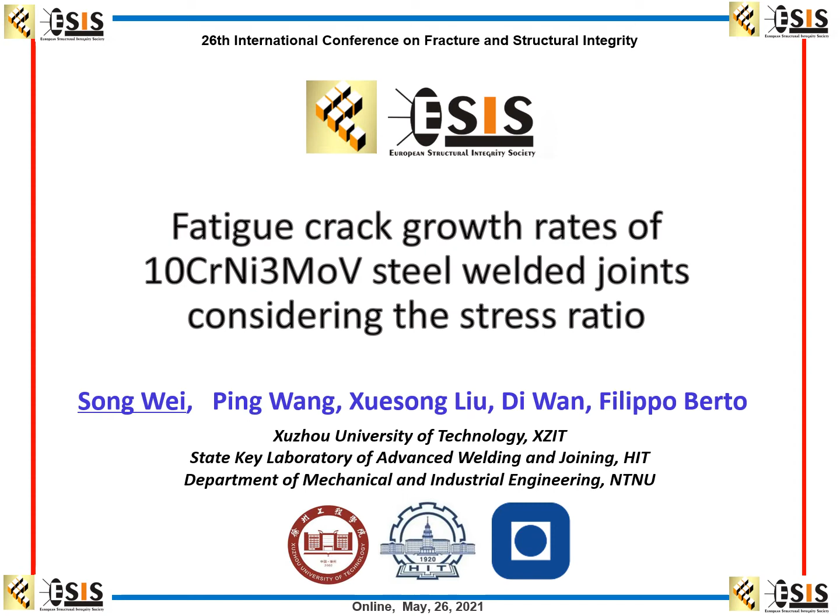This particular presentation is analyzing the basic fracture properties of a high-strength steel and its weldment, considering the stress ratio, but as part of the larger project of design, analysis as well as manufacturing of ship and submarine welded components. So this presentation contains four parts.

The first one is about the motivation of our investigation. The second is about the fatigue crack growth rate experiments. Third is about the result of the fatigue crack growth. The fourth is about the conclusion.

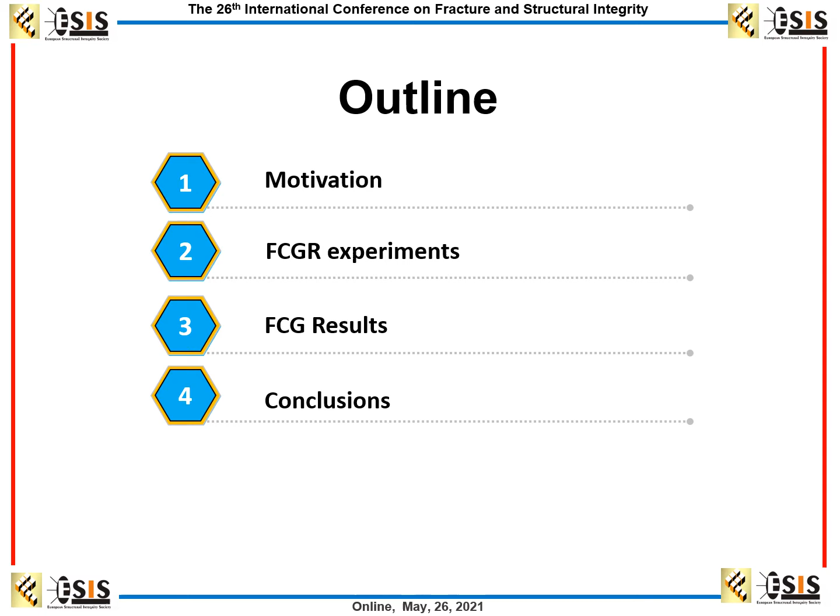Some background and motivations for the work: as many of you may know, within future industry development, one effective way to enhance the lightweight of structure is to increase the strength of steel for decreasing the thickness of the plate. It is dealing with a conventional material. How about the structural performance, especially for the welded components? For example, there is no corresponding welding filler for high-strength steel or very high-strength steel in our country.

However, for these components, which are driven by cyclic loading or fatigue loading, there is a unique opportunity to utilize the high-strength steel and investigate the performance of the specific welded joint weldment. So in the shipbuilding or marine structure fields, this welding is very common.

So for the welded joints of high-strength steel, there are some problems during the welding processing or the service condition. The first one, the hydrogen-induced cracking issues, or the softening of the HAZ and the decline of the toughness. How to solve the problems? We can do it from two aspects.

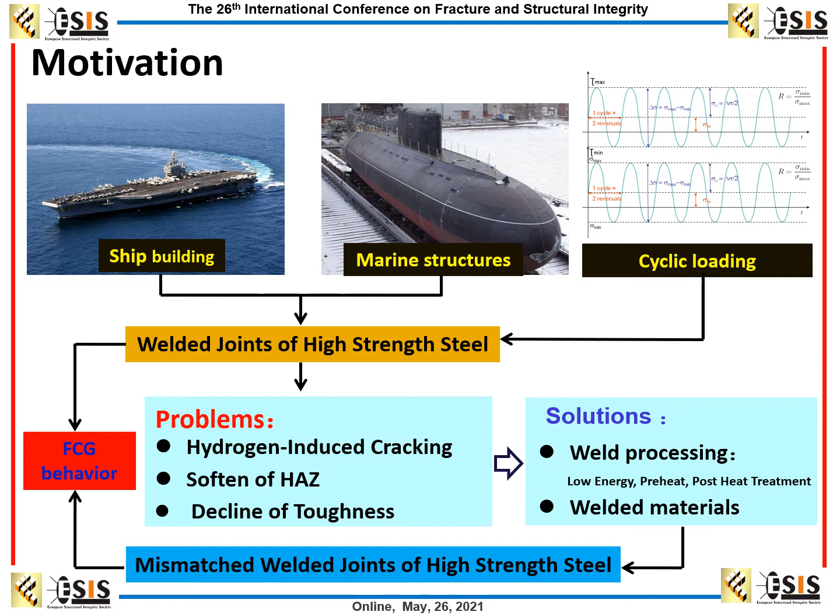So how about the fatigue crack growth behavior? So this is the topic of our presentation, our work. Thus, the study aims at investigating the FCG properties of base metal and mismatched weldments. The second is the stress ratio and post-heat treatment effect on the FCGR of materials. The third is the FCGR mechanism of the base metal and the mismatched weldment.

In future, the possible application of this study: the first aspect is about improving the FCG, fatigue crack propagation life prediction of the welded joint, and the mechanism of FCGR is analyzed through crack paths in the microstructures and the fractography.

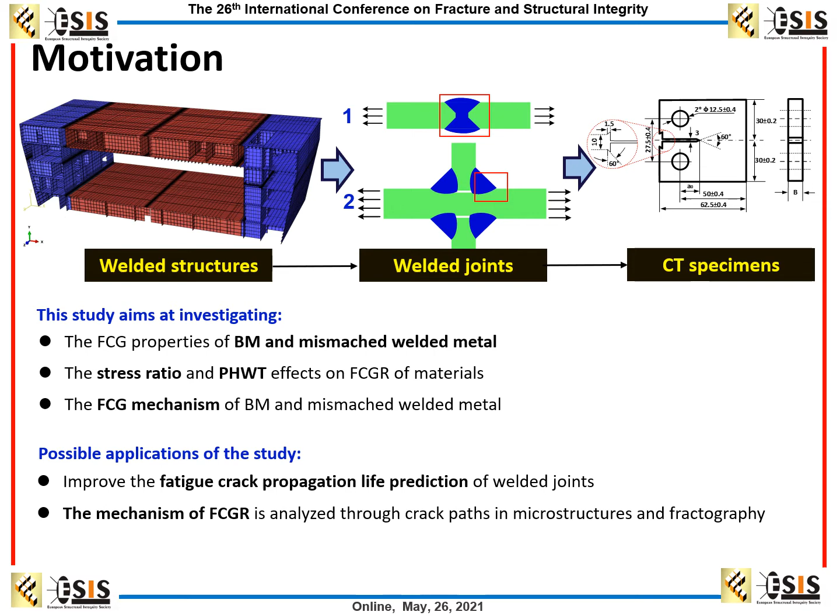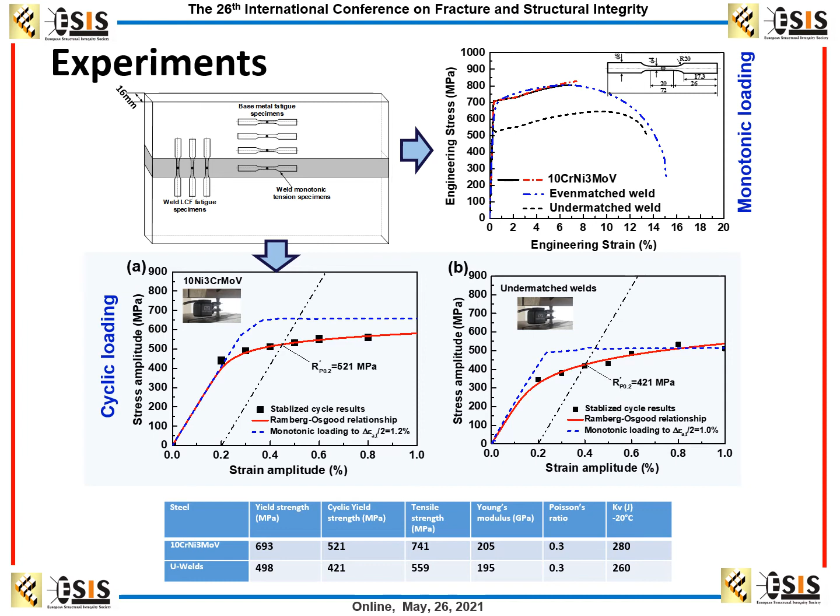This is the basic mechanical properties of the materials. So the parameters of the materials are presented in the summary. We get the CT specimens from the thick welded plate, which is made by the multi-pass welding processing.

The details by which the experimental investigation to characterize both the welded joint and the properties were conducted are as follows. It should be noted that the test frequency ranges from 10 Hz to 15 Hz for all the FCGR tests, conducted by using several hydraulic controlled load frames.

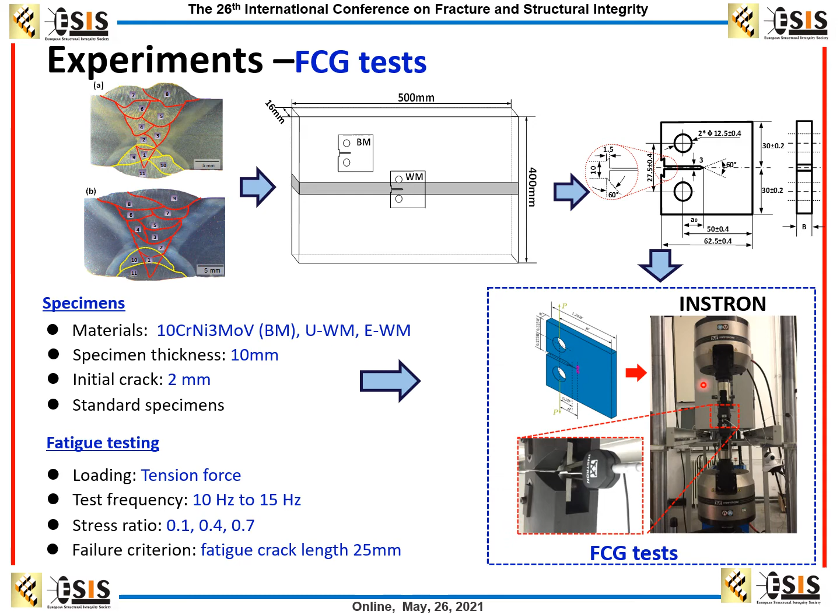And three stress ratios are loaded in the test, and the crack propagation length of 25 is defined as the failure criterion. So this is the machine of the FCGR test.

The FCGR result is presented in this page. We compared the base metal, even matched weldment and undermatched weldment at the residual stress ratio 0.1. From the result, we can see the FCGR comparison between the as-welded and the PWHT steps conducted for these materials. The FCGR of base metal isn't influenced by the PWHT processing in the first figure, which means that there is no residual stress effect on the FCGR in the base metal.

The FCG data on the base metal are compared with the BS 7910 and the IIW standard simplified Paris law reference lines. And it can be seen from the undermatched weldment figures that the difference between the as-welded and the PWHT state for the undermatched seems to have no significant effect on the FCGR data at stress ratio 0.1.

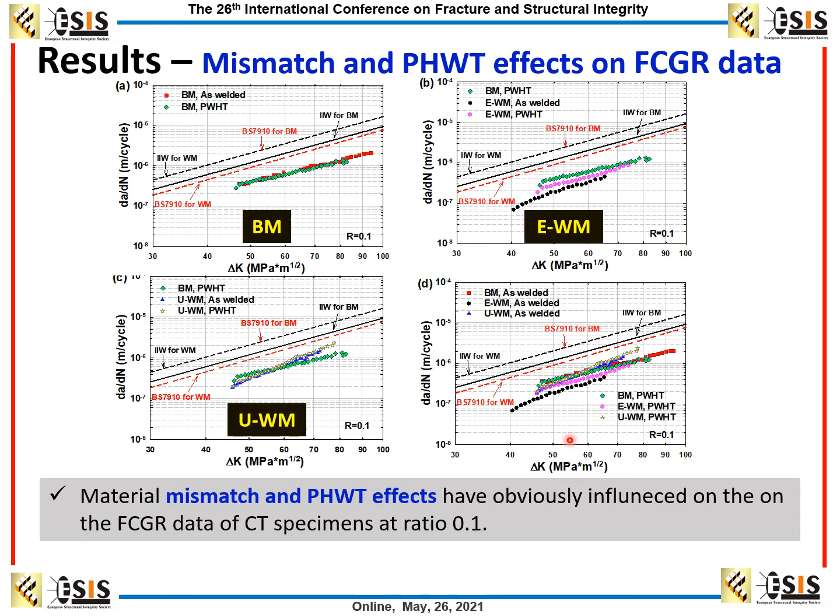So the FCGR data are summarized in this figure for these three materials. The material mismatch and the PWHT effects obviously influence the FCGR data of the CT specimen at ratio 0.1. Although some articles report that the R ratio sensitivity is essential in some high strength steel materials or bridge structure steels, the R ratio effect on the FCGR data of our study is visible, especially for the even matched weldment.

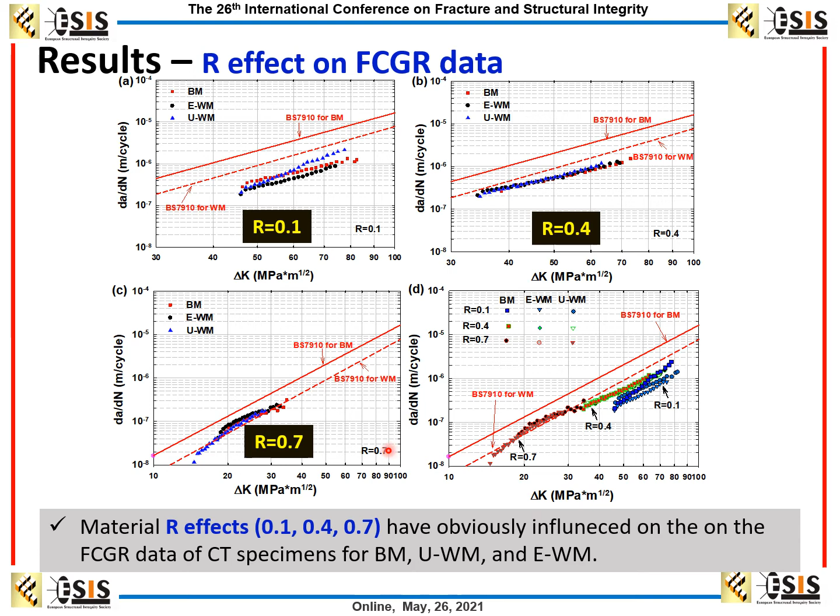It also can be observed that the FCGR in the BM and the WM becomes faster as the R ratio increases, which is consistent with the consensus on the R ratio effect for most metallic materials. So the R ratio has obvious influence on the FCGR data of CT specimens for base metal, undermatched weldment and even matched weldment.

As we all know, the residual stress has great influence on the FCGR behavior. Generally, the tensile residual stress will accelerate the FCGR, and the compressive residual stress will retard the fatigue crack propagation. Looking at the residual stress distribution of the even matched weldment and undermatched weldment, considering the SSPT effect, the result shows that for the even matched weldment, the simulation result has good agreement with the experimental data considering the SSPT effect.

However, for the undermatched weldment, the residual stress distribution has great agreement for both considering the SSPT effect or no SSPT effect. So the residual stress of the even matched and undermatched weldment is better considering the SSPT effect, which has a significant influence on the even matched FCGR.

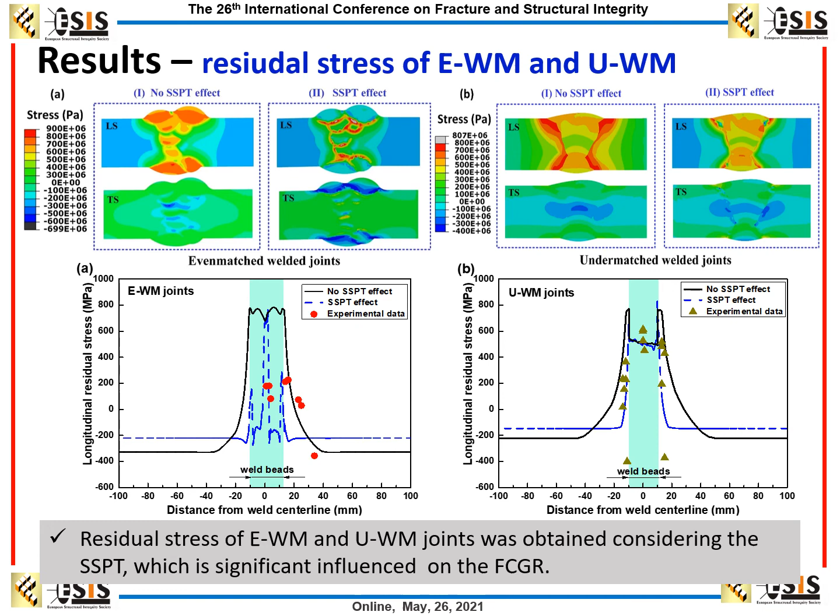This figure shows different scales of optical micrographs of the crack path of the weldment for the CT specimen. As we can see from the comparison between the even matched and undermatched weldment, the even matched weldment overall crack growth path is smoother than the undermatched weldment. The fracture crack of even matched passes through the mixed bainite and coarse grained ferrite material grains, which results in small crack deflection.

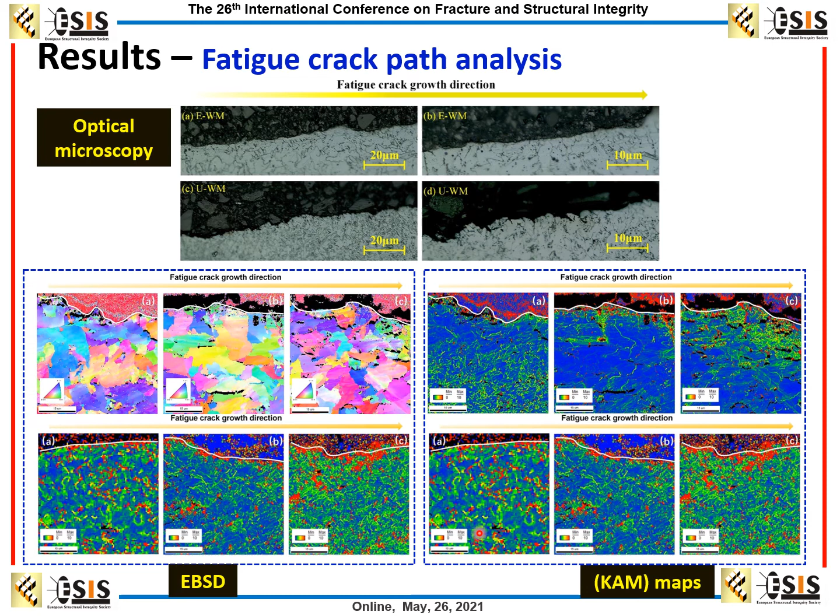From the EBSD and the KAM map, showing the plastic deformation, these results show different characterized results between the even matched and the undermatched weldment.

The fracture morphologies of even matched and undermatched specimens under these regimes at two different magnifications. The dimples on the fracture surface of even matched specimens are deeper than the undermatched weldment specimens, showing the typical ductile morphology for metallic materials. It further indicates that the even matched weldment has stronger plastic deformation ability than the undermatched weldment.

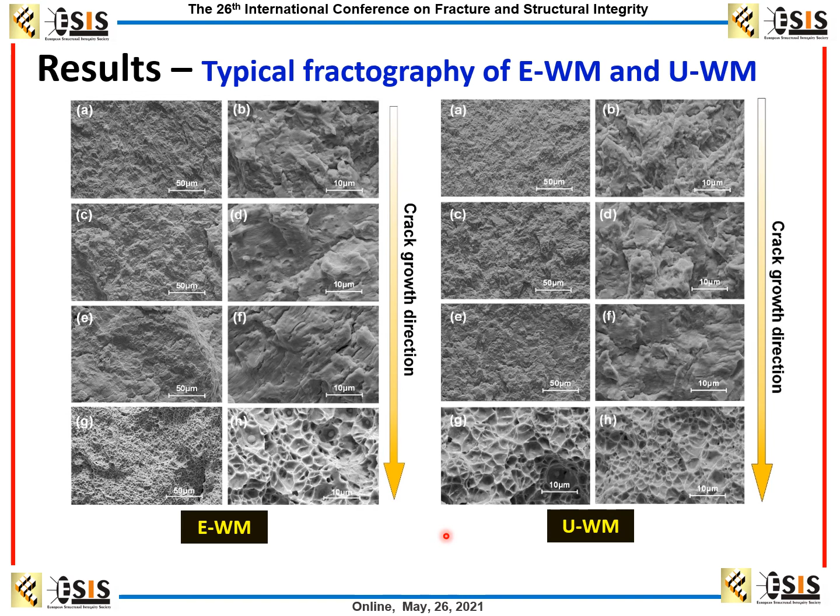Okay, so the last section. The conclusion contains 4 points. The first one is that for the low R ratio, the undermatched demonstrates higher FCGR curves than the base metal or even matched weldment. There is no significant difference between FCGR for even matched and undermatched weldment at high R ratio.

The second one is that two different fracture mechanisms are exhibited for the weldment. Transgranular fracture appearances were shown on the even matched weldment, while intergranular fracture surfaces were observed on the undermatched weldment. The third is that the FCGR under the as-welded state is slightly lower than the PWHT state, attributed to the tensile residual stress effect on the fatigue crack tip.

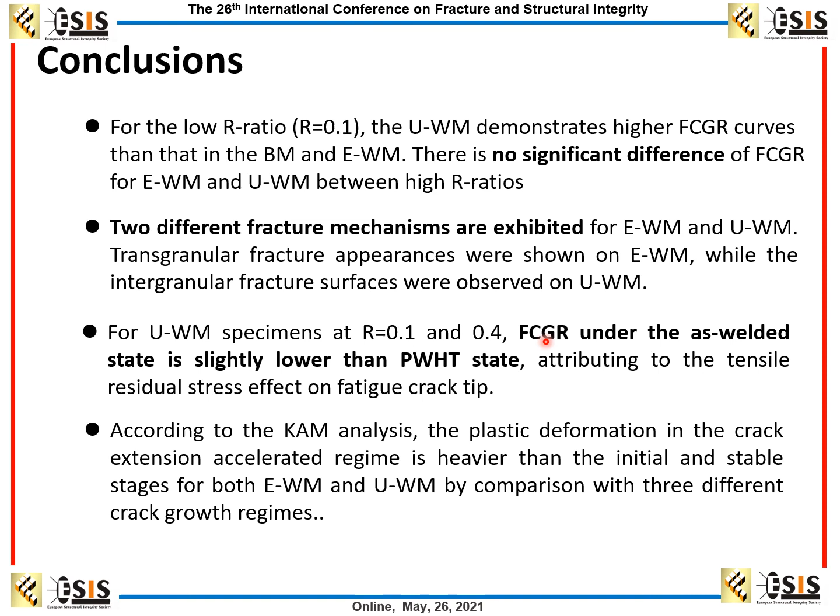The fourth is that according to the KAM analysis, the plastic deformation in the crack extension regime is higher than the initial and the stable stage for both even matched and undermatched weldment, by comparison of the three different crack growth regimes. Thank you for your attention.